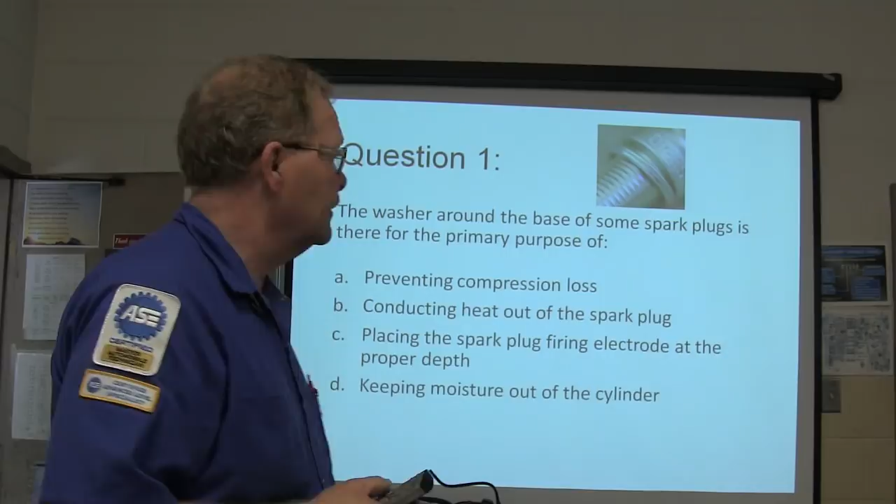We're gonna ask some questions here, and we're gonna see if we get these questions right. We're gonna swap papers when we're done. We're gonna grade our papers. And if you make a good grade on this, more power to you. If you don't, it'll be a wake-up call, right? This is not a difficult test. It's very simple stuff.

I want to ask you if the washer around the base of some spark plugs is there for the primary purpose of what? Why is it there? Is it preventing compression loss, conducting heat out of the spark plug, placing the spark plug firing electrode at the proper depth, or keeping moisture out of the cylinder? Just write your answer in the box. Okay, I already canceled 2 of them, so you need one more.

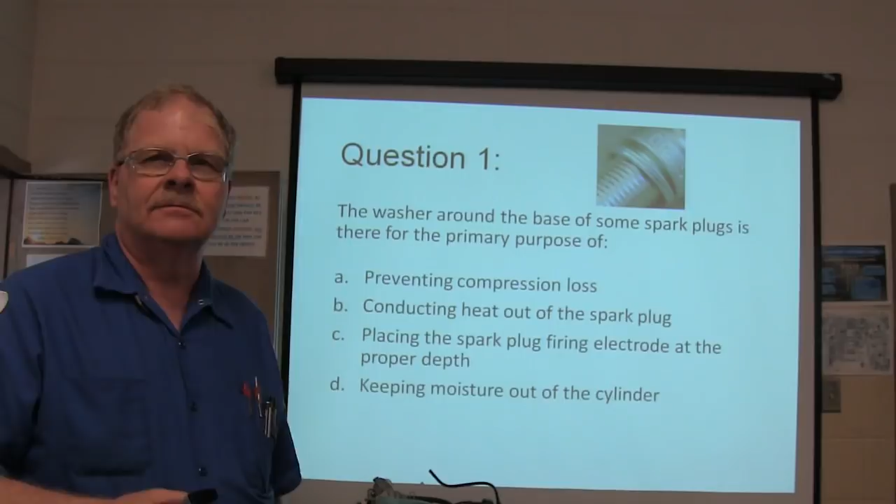If you're stressed out by tests, don't be. It's not hard. You know what stressed spelled backwards is? Dessert. What? It really is. If you take the word stressed and spell it backwards, that's desserts. You've never seen that before? Plural. Yeah.

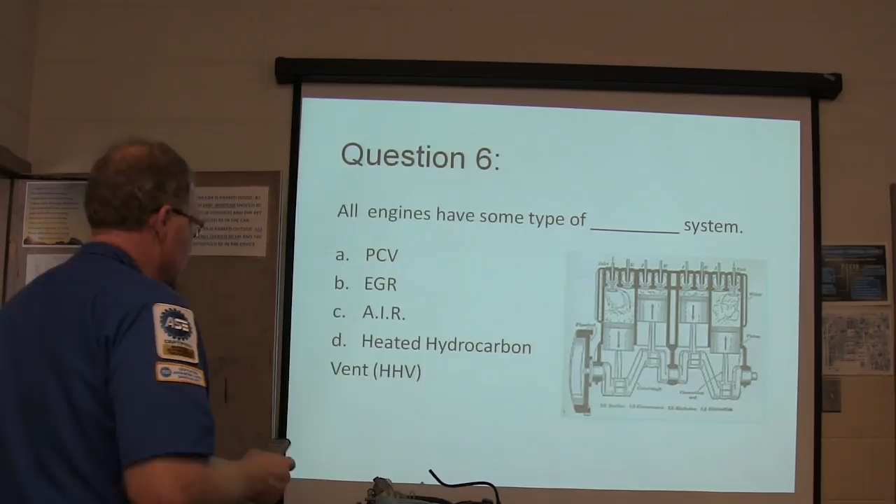What's AIR? Is it air? Air injection reactor. Oh, okay. I thought it was air. Now, whenever you see these little dots after each letter, that means that's an acronym. I know, but that's why I was asking.

That's like the acronym PAID. Remember what that stands for? Performance, attitude, integrity, and dependability. If you have good performance, but you have a bad attitude, no integrity, and you're not dependable, you can have 3 of those and not have the other one and be a failure.

You can do your work. Yeah, I'm telling you, if you're short in any of those 4 areas, performance, attitude, integrity, and dependability, if you perform good, you got integrity and you're dependable, but your attitude sucks, sooner or later you're gonna be gone. They're gonna get enough of your junk, they're gonna send you down the road. I've seen it happen too many times.

There were 25 mechanics in that shop where I worked, and I saw a lot of them come and go during the years over there. And it was always tied to one of those things whenever one of them would get let go. Integrity means, this one guy, whenever the work would come in, he would tell the customer privately, if you'll bring this to my house, I'll do it cheaper. And he'd lay out of work the next day and it was stealing work from the shop. The service manager went by his house one day and saw one of the cars out there, and that was over for him.

A lean air fuel mixture bums? Looks like, what's it, bums? Should say burns, outstanding. A lean air fuel mixture burns cold and fast, hot and slow, or cold and slow.

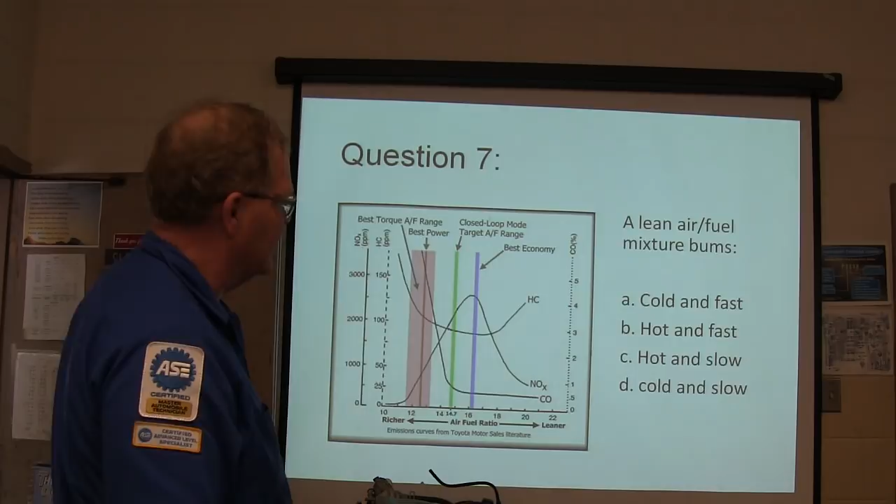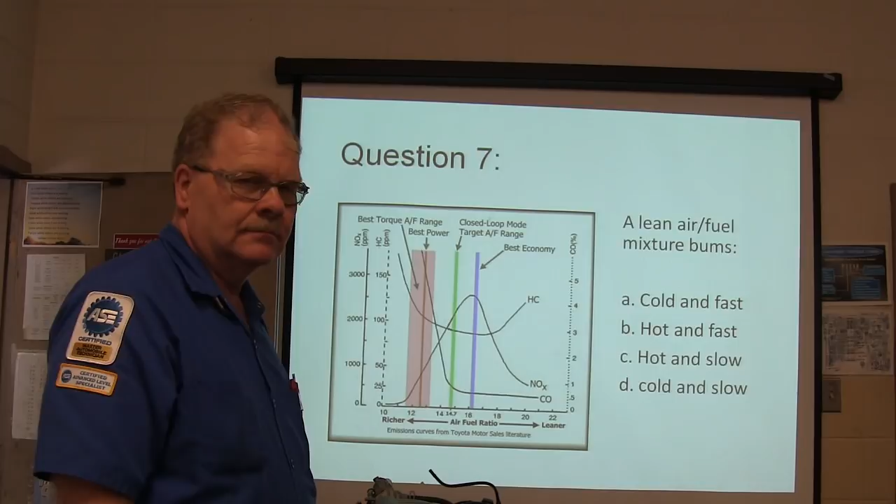The fuel pump on a vehicle can be heard for 2 seconds at key on, but the engine will not start. The fuel gauge shows a full tank. Fuel pump current draw is 8.9 amps. Which of the following is least likely to be the cause? Empty fuel tank, water in the fuel tank, inoperative fuel injectors, fouled spark plugs. So which one's least likely? All of those answers are possible, except one of them is not likely to be the cause.

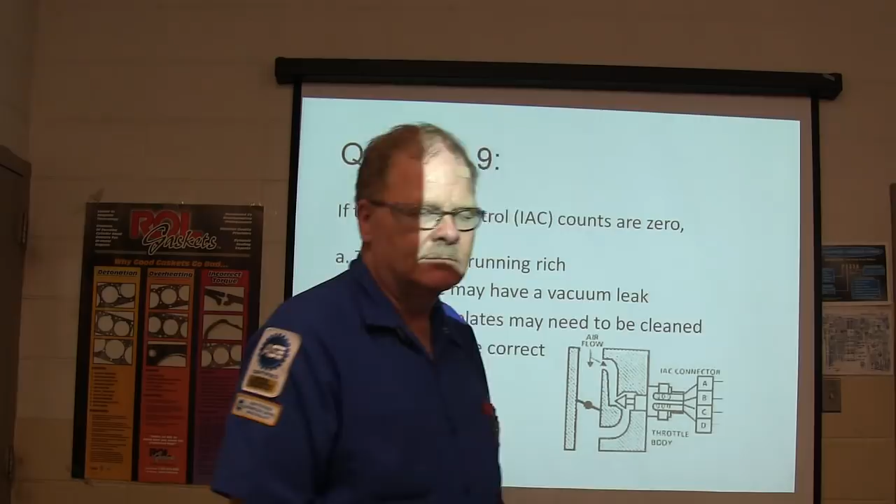What you know? I got a blow dryer, it ain't gonna get no better. Well, it'll get better if you don't touch it a lot. You know?

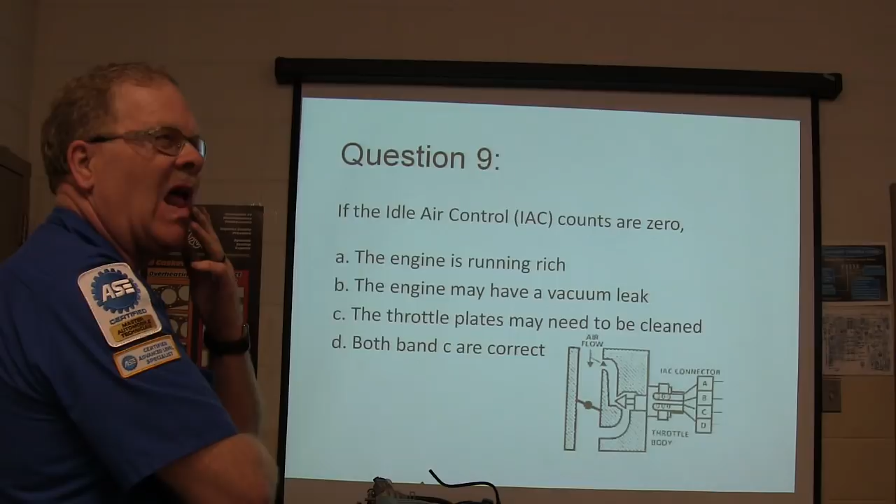Question 10. An engine's running at 243 degrees. The cooling system is full of clean coolant. The air conditioner is off, but the fans cycle on at the proper engine coolant temperature, but they never cycle off. Both heater hoses are cool to the touch. Of the following, which is the most likely to be the problem? Stuck open thermostat, bad water pump, too much heat transfer from the radiator to the ambient air, or too much hot gas EGR flow.

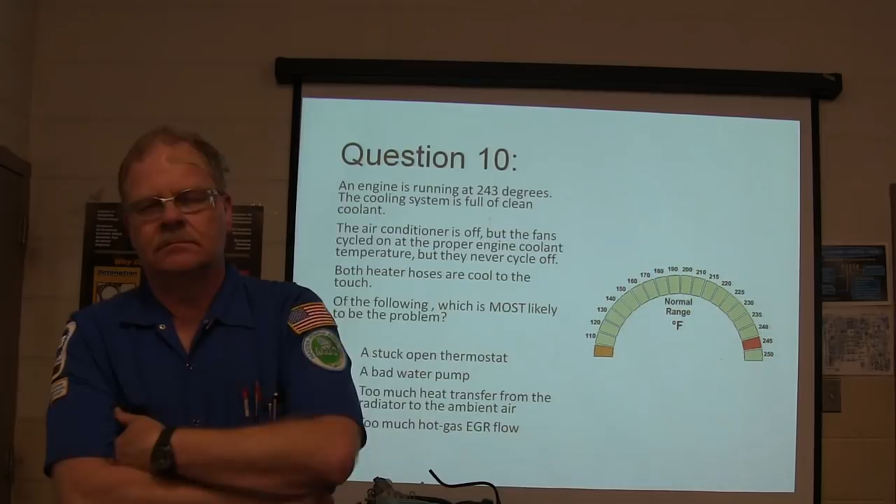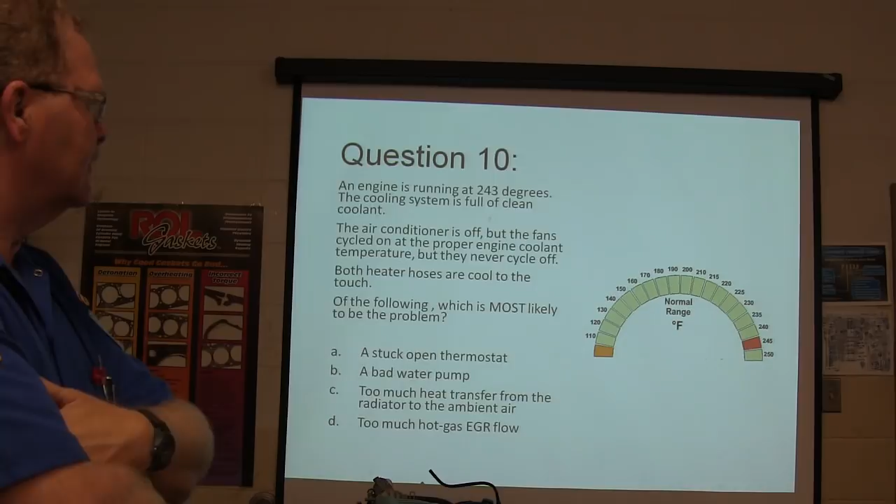Technician A says the output of a Hall effect sensor can be checked with an AC voltmeter. Technician B says the output of a variable reluctance sensor can be tested with a lab scope. Who is correct? A only, B only, both A and B, or neither A nor B?

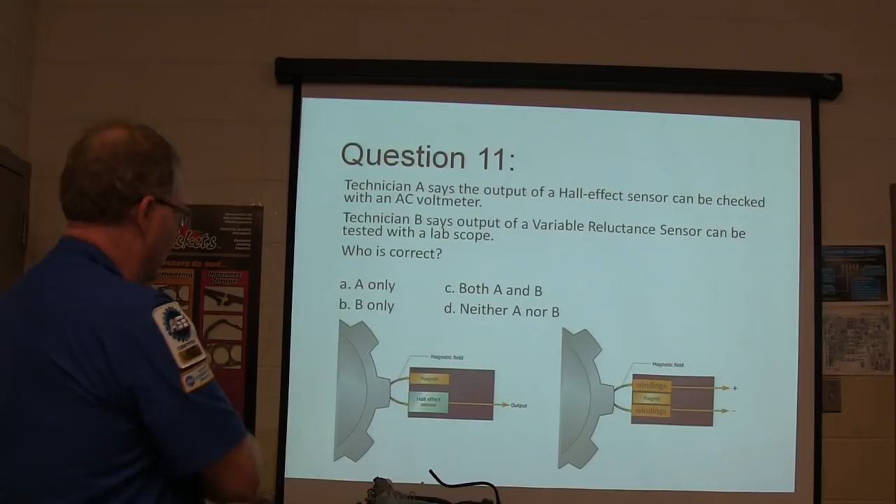This isn't exactly drawn right, because even these kinds of sensors will typically have 2 or 3 wires. What was one thing that OBD1 regulations required after 1988 that was not previously required?

EGR system failure can cause A, higher cylinder combustion temperatures, B, pinging detonation, C, higher NOx emissions, or D, any of the above.

Kendrick, are you killing this? Killing this test? Yep, test you'll be, buddy.

A technician has been led by diagnostic trouble codes to investigate fuel trim numbers as follows. Short fuel trim, 1%. Long fuel trim, minus 25%. A, the fuel filter may be restricted. B, the crankcase oil may be contaminated with fuel. C, the fuel pressure may be low. Or D, any of the above.

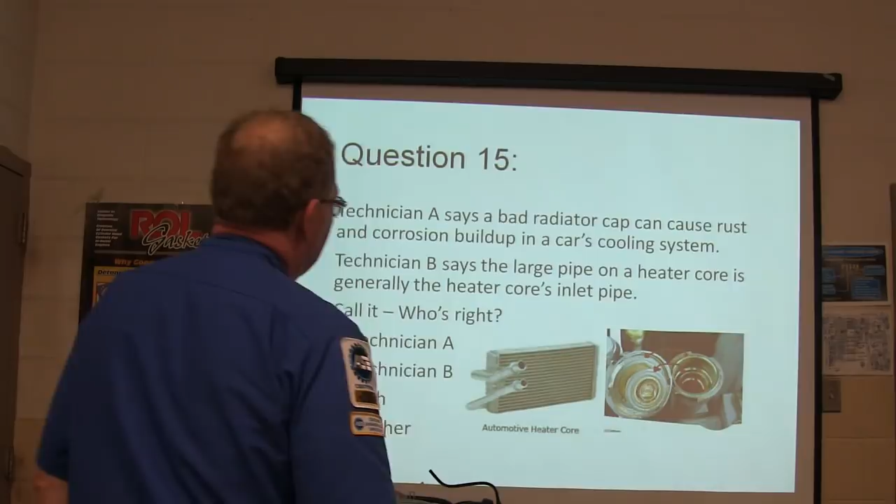Technician A says a bad radiator cap can cause rust and corrosion buildup in a car's cooling system. Technician B says the large pipe on a heater core is generally the heater core's inlet pipe.

Technician A says injector firing frequency is directly tied to crankshaft sensor input. Technician B says on an engine with a crankshaft sensor and a distributor, improper distributor rotor alignment can be corrected by adjusting the ignition timing.

A technician is investigating a no-start condition on a vehicle with the following PID values. What is the most likely reason for the no-start? Faulty baro sensor, weak throttle position sensor, open IAT sensor circuit, or none of the above, he needs to check more PIDs.

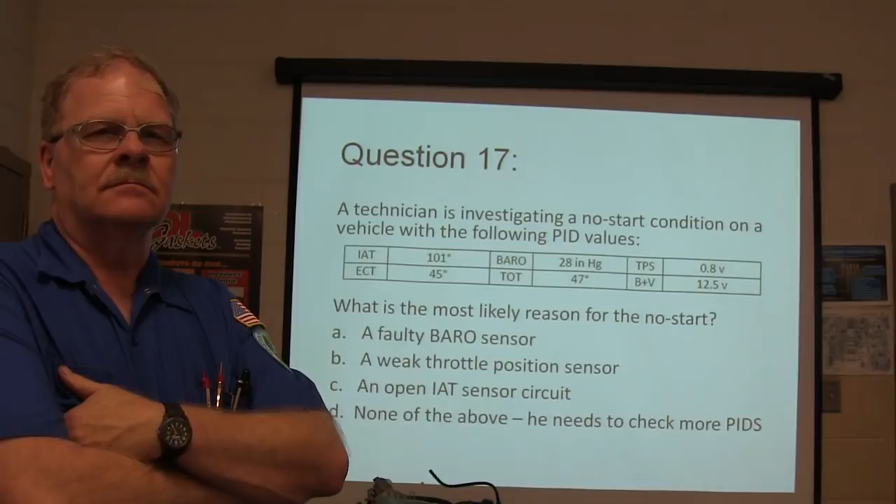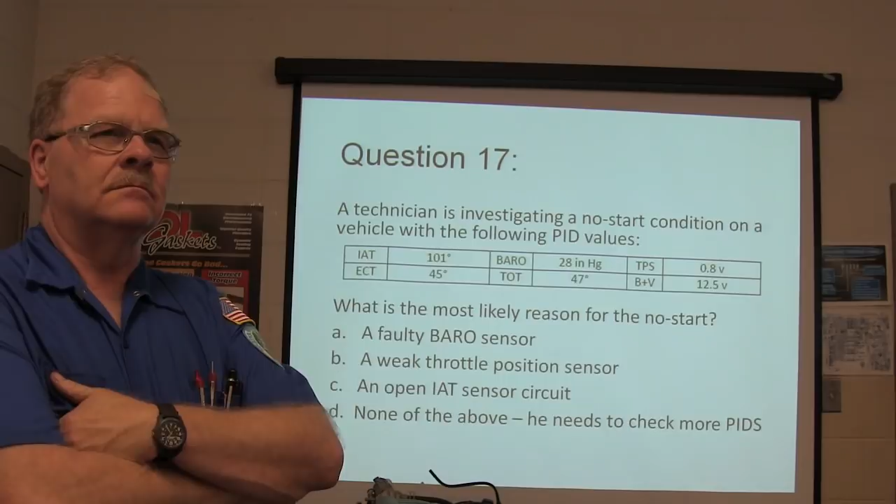A five-cylinder engine has a firing event every how many degrees?

The temperature stamped on the copper case of the thermostat's wax pellet is the temperature at which the thermostat does what?

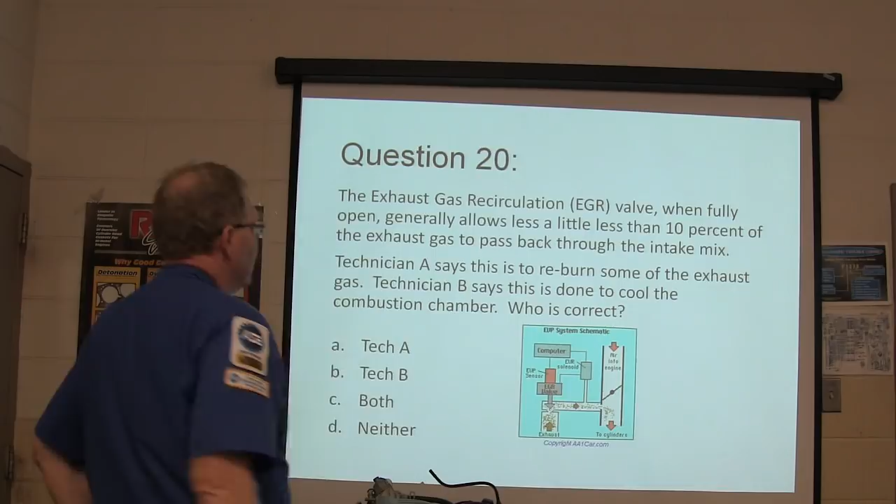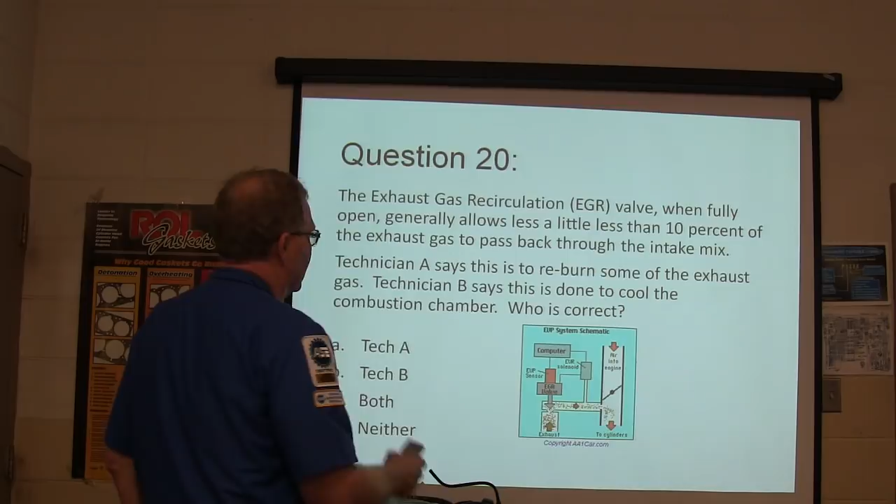The exhaust gas recirculation valve, when fully open, generally allows a little less than 10% of the exhaust gas to pass back through the intake. Technician A says this is to reburn some of the exhaust gas. Technician B says this is done to cool the combustion chamber. Who's correct?

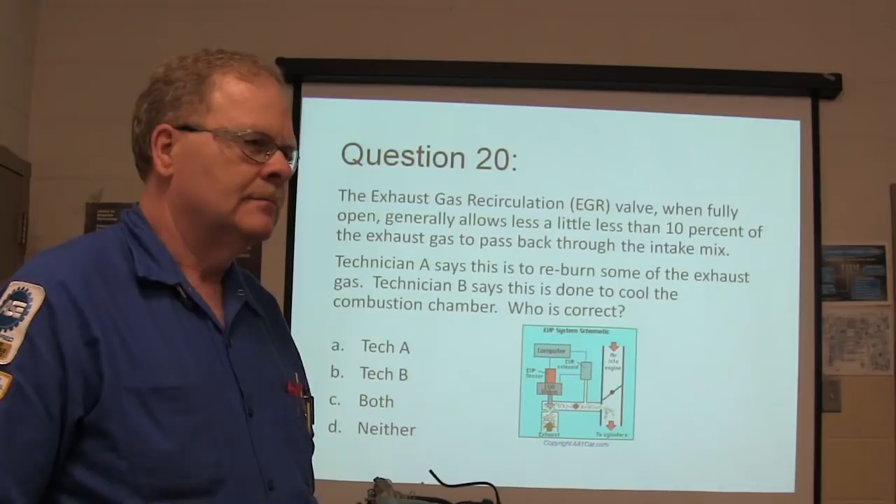Kendrick, you already answered one?

If the vehicle speed signal is suddenly lost at road speed, what generally happens? A, the speedometer needle drops to zero. B, the speed control suddenly becomes dysfunctional. C, the transmission drops back to first gear. D, all of the above.

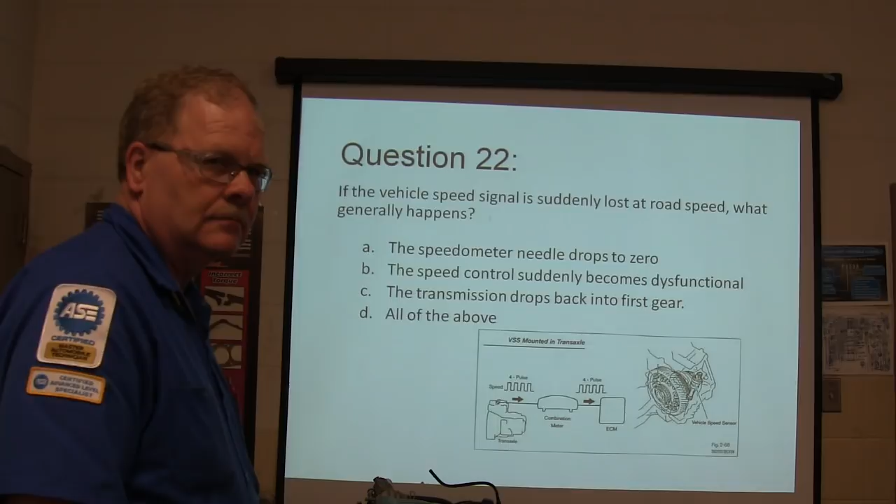If an engine with an automatic transmission is placed in drive with the brakes locked and the engine accelerated to wide open throttle, what information might be gleaned from watching the stall speed on the tachometer?

It can be none of these, but it could be all of these, but which one would be none of these? Don't you just love the ones with all those choices? Less likely to guess your way out of that one, huh? True. Well, you know it can't be all of the above and none of the above at the same time. That's a thinker.

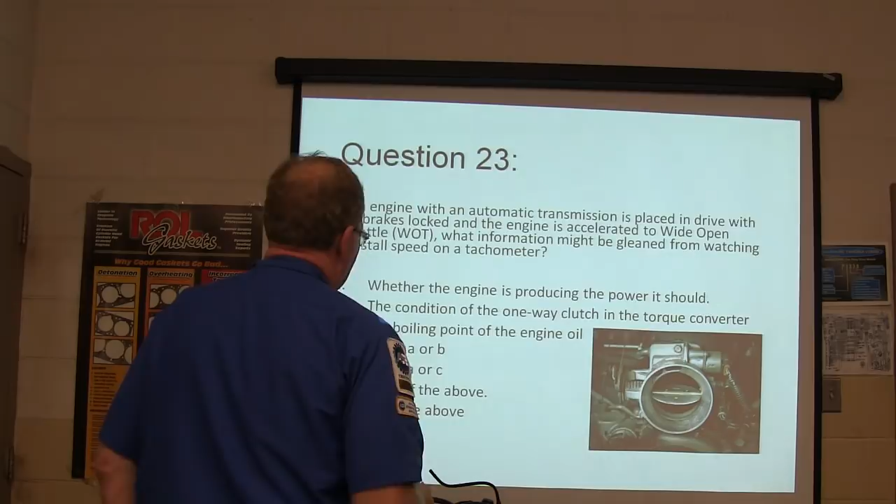A vehicle is traveling down a straight highway with short and long fuel trims hovering near zero. Suddenly, a spark plug on bank 2 fails and begins misfiring. What will happen to the O2 sensor signal on that bank when this takes place? The moment it takes place, what does the oxygen sensor signal on that misfiring bank do?

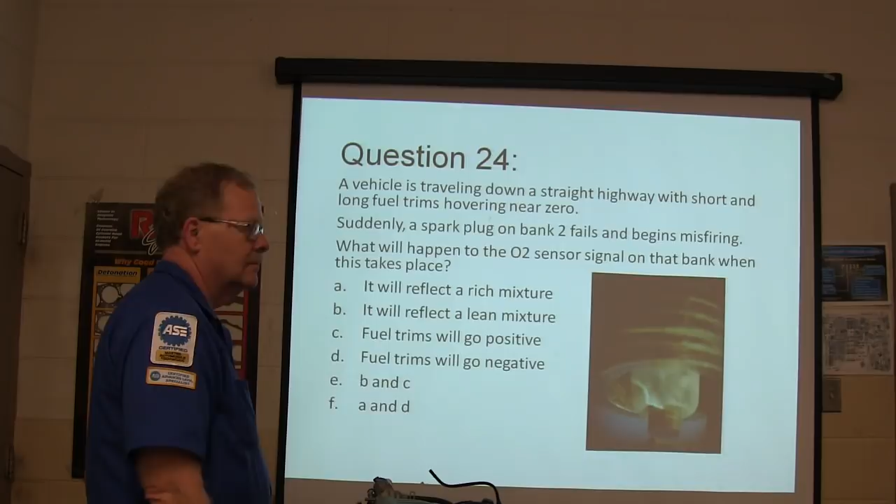If you switch on the ignition and hear the fuel pump, what do you know? Well, do that. Always got one, right? Is that good?

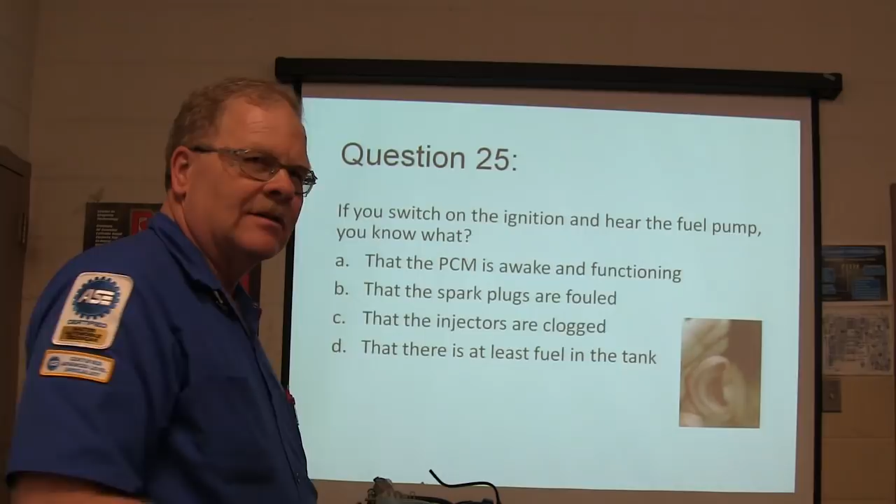Right now, I like it. Because, who is this outside? That's probably Timothy. It sounds like Timothy, because he drags in about this late after lunch, and that sounds like his ratty old truck. Savage.

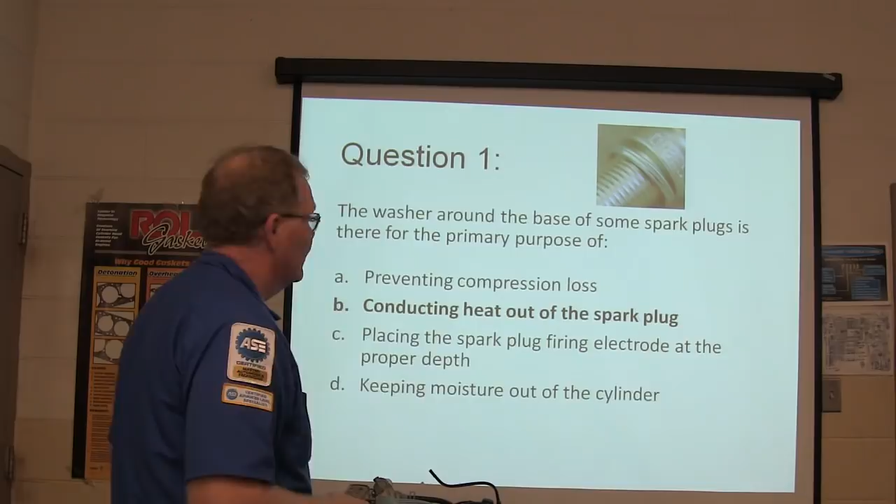This one here is B. It's there to conduct heat out of the spark plug. Do we just put a check mark next to it if it's wrong? Yeah. That's probably the only one anybody will miss though.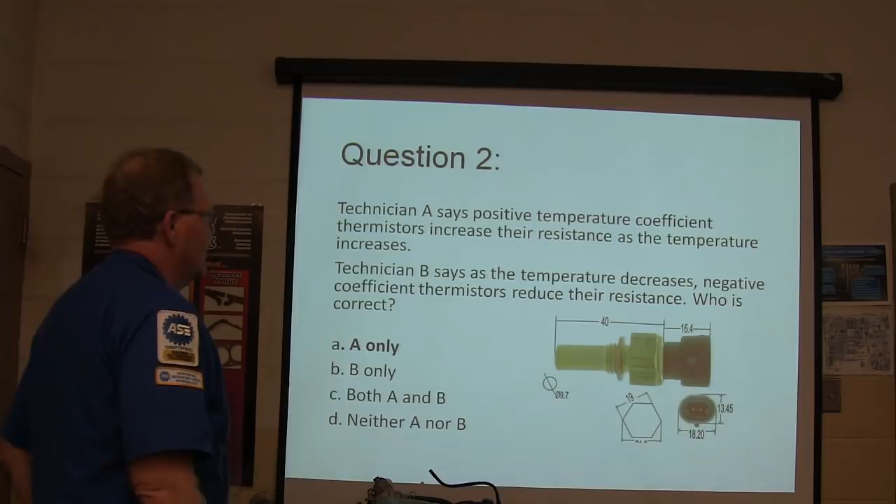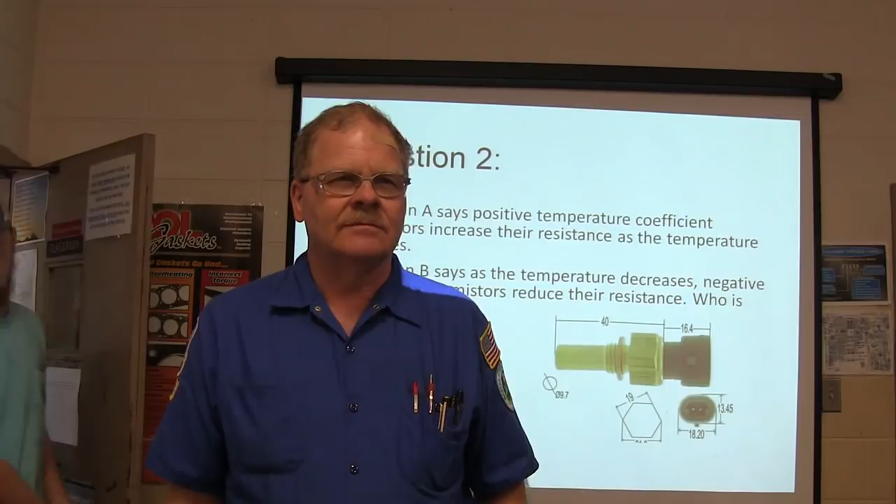Technician A says positive temperature coefficient sensor, blah blah blah. That's A only. Negative temperature coefficient thermistors actually decrease their resistance as they get hotter, which is the opposite of what you'd expect. A light bulb is a positive temperature coefficient thermistor.

I recognize the sound of that truck and all that. You missed the test. Whoever got Timothy's paper, give him a zero.

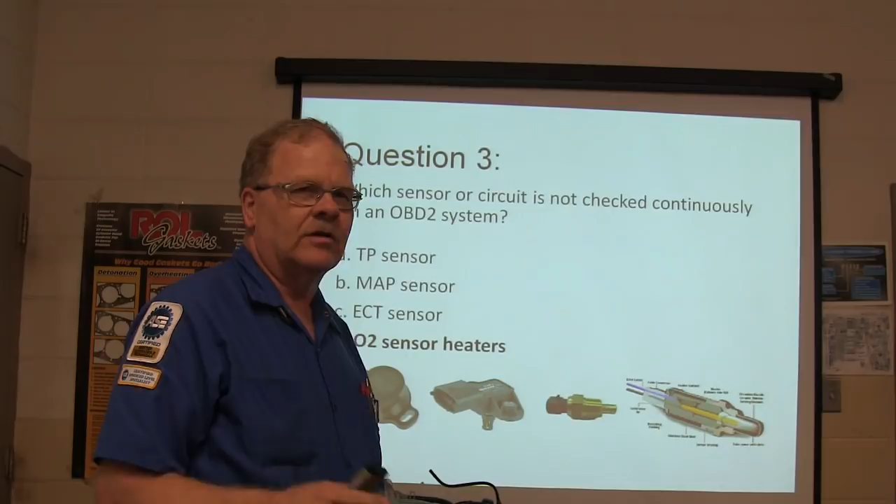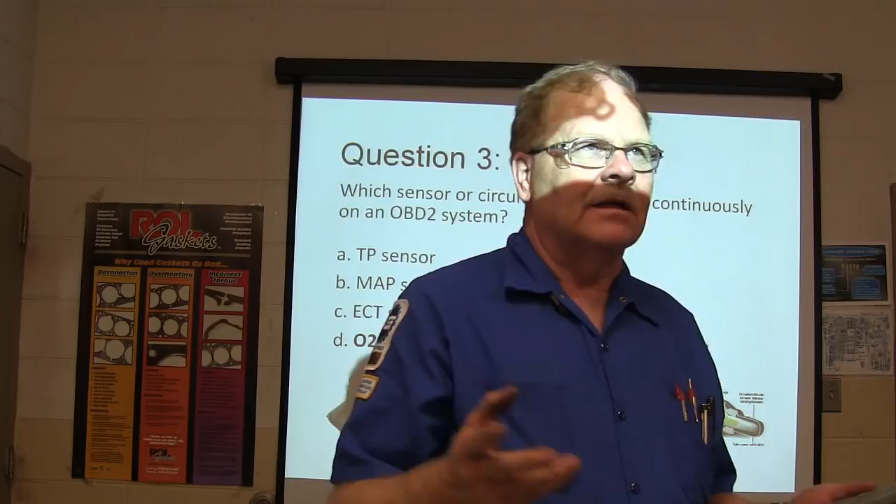All right, this is D. O2 sensor heaters can only be checked whenever you're looking at the different monitors. You got continuous monitors, and then you got monitors where certain criteria has to be met. For example, the engine controller cannot check the catalytic converter unless it's been driving for a certain amount of time at a certain speed. Then the oxygen sensor, the fuel trim monitor, has to be in closed loop and all that. There are certain things that have to be happening, like also the evaporative system will not measure the integrity of the evaporative system unless it has between 15 and 85% fuel.

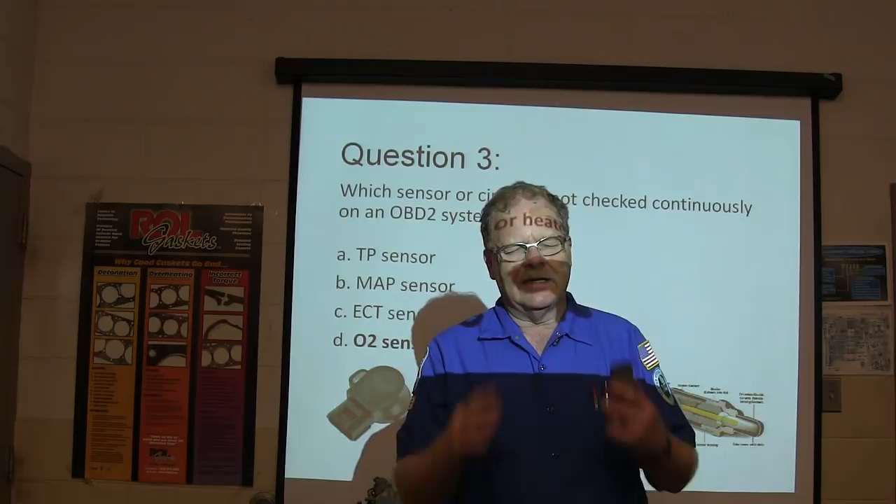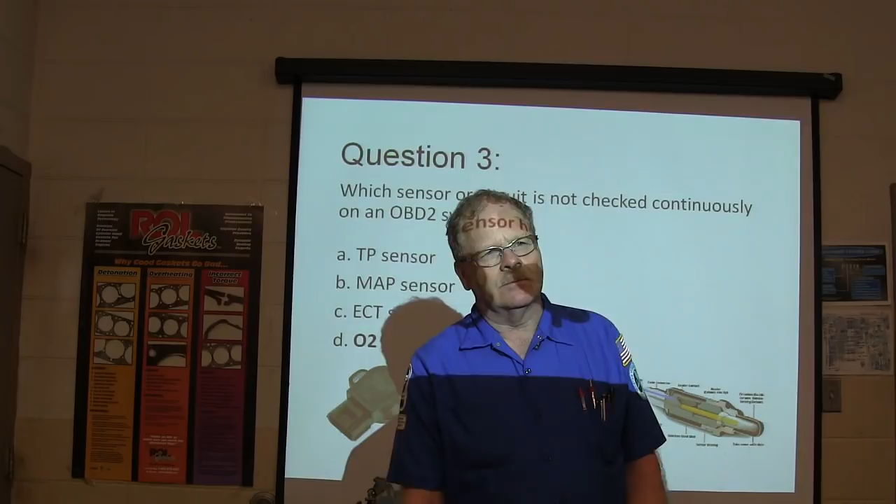If it's full all the time or empty all the time, why should you not run your gas tank empty all the time or real close to empty, like Tim does? What's up with that? Why should you not? Somebody give me a reason.

You can't check the evaporative system. That's part of it, but the other part is, if you're running real close to empty all the time, you may be cavitating and getting air in there, which may wear the fuel pump out quicker. Also, if you got a lot of empty real estate inside that tank, water has a tendency to condense in there. It's not so much a big deal if it's a plastic tank, but if it's a metal tank, you're going to have rusty innards on your tank and everything else.

You bring me some stuff there, Hot Rod? No, come on, I'll sign the paper in here.

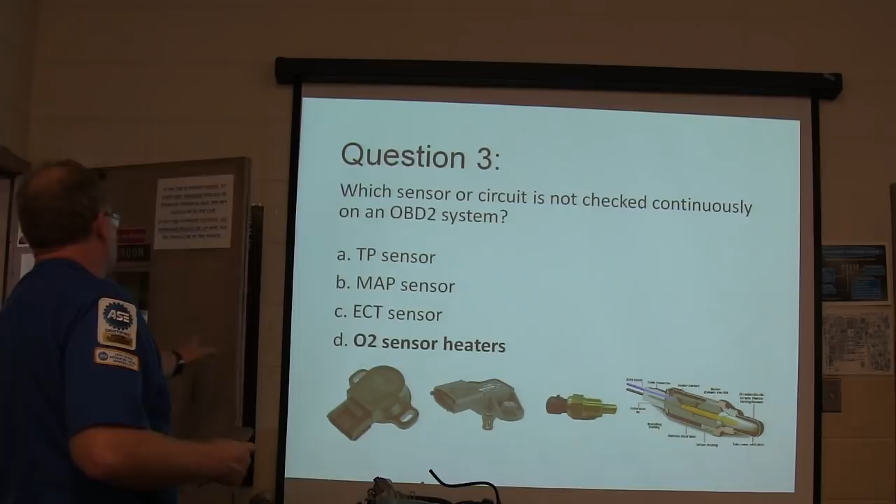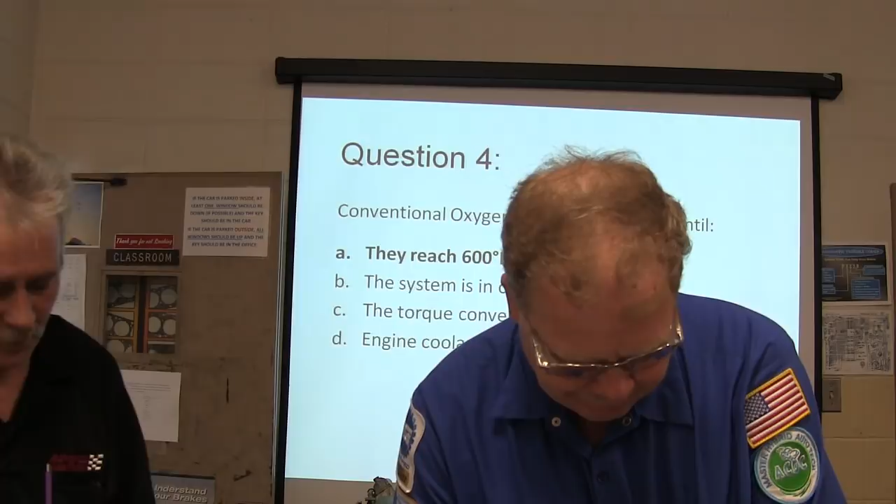What is that oil and filter for? I don't know, he told me to bring it. Yeah, I guess I probably shouldn't. Brake fluid I knew about, yeah. There you go, right, thank you, y'all have a good day. Thank you, sir. Is it in the box going back or return to? That is, they're going back.

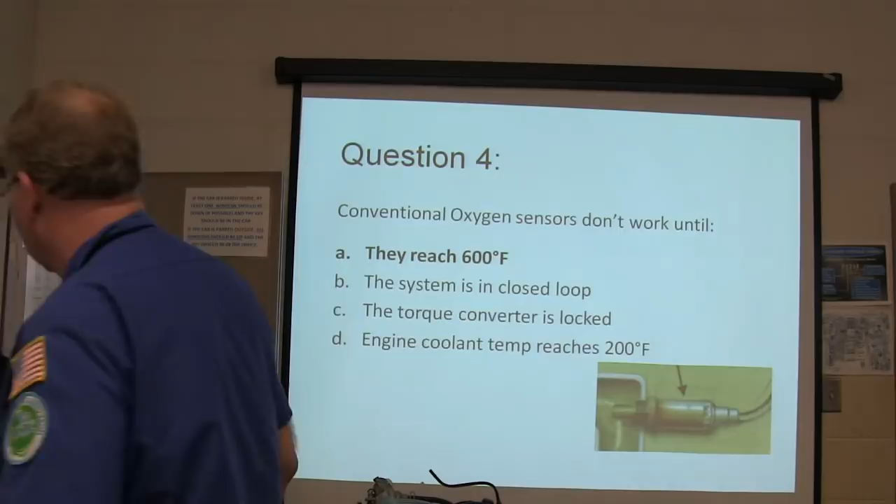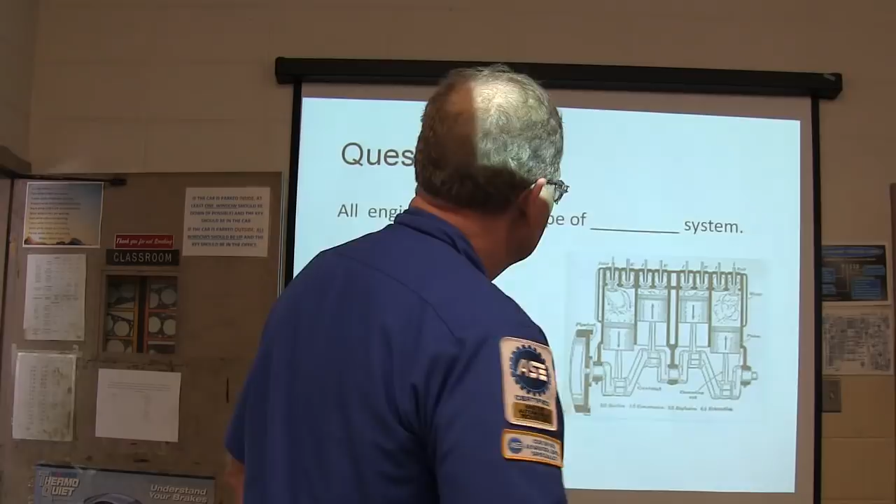All engines have some type of PCV system. What's PCV stand for? Positive crankcase ventilation. Positive crankcase ventilation, good job.

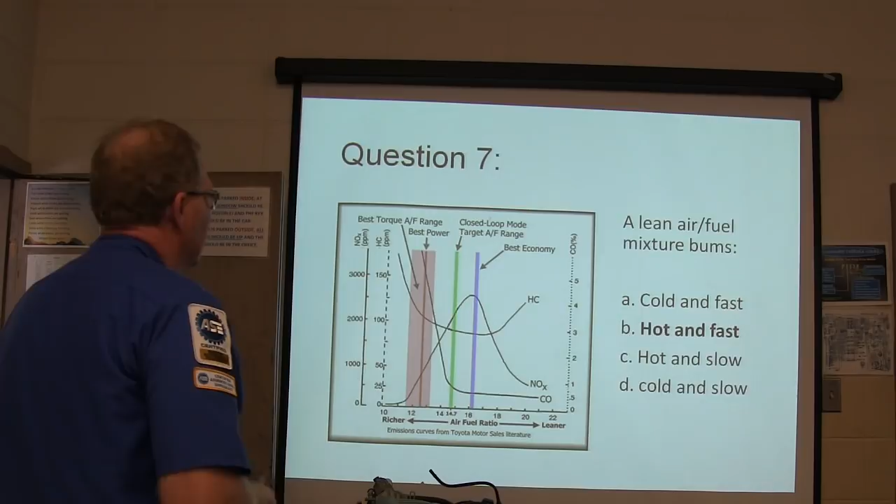Clean air, lean air-fuel mixture burns hot and fast. A rich mixture burns cold and slow. If you've got a rich mixture, if I pull a spark plug out and it's running rich, what's that spark plug going to look like? It's not necessarily going to be gas on it, I mean it can be dry, but it can be sooty. If it's got soot on it but it's dry, it's running rich. If it's running really rich, it's going to have hydrocarbons coming out the exhaust and have a wet plug. If it's running just mildly rich, it's going to have carbon monoxide coming out the exhaust and it'll have a sooty plug. If it's running really, really lean, it'll have a snowy white ceramic on that plug usually.

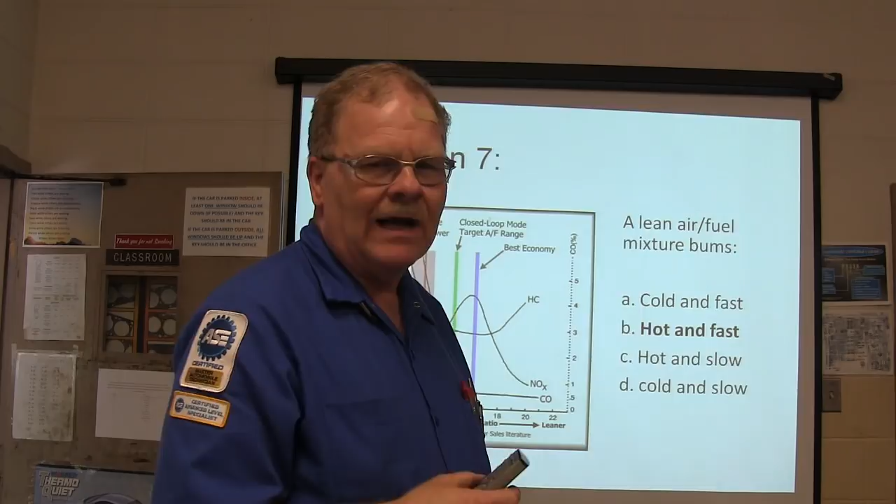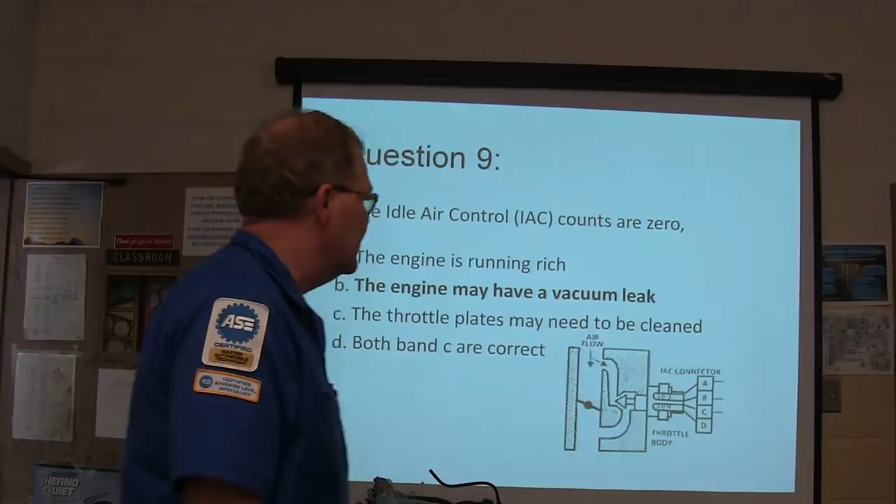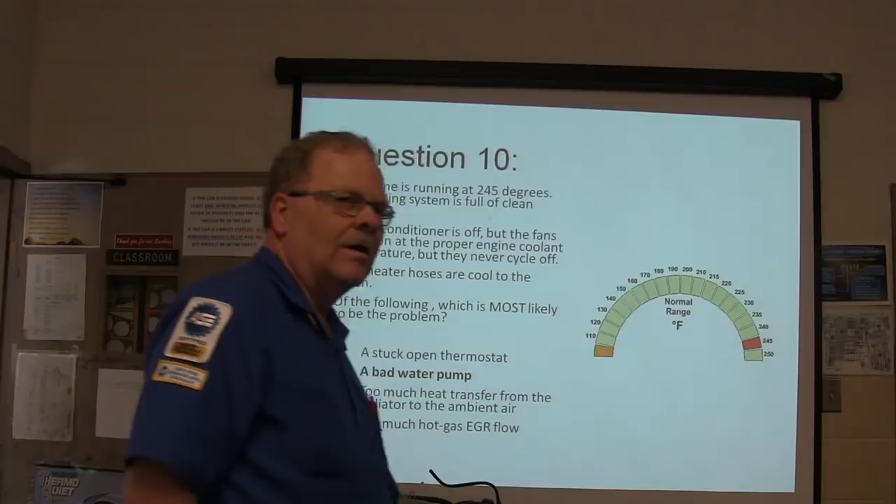Now what do you know? Air conditioner's not on, it heats up, heats up, heats up, fan kicks on, never kicks back off, you got trouble. If it keeps getting warmer and warmer, the fan keeps running, you better find out what's going on. You're gonna cook him, all that.

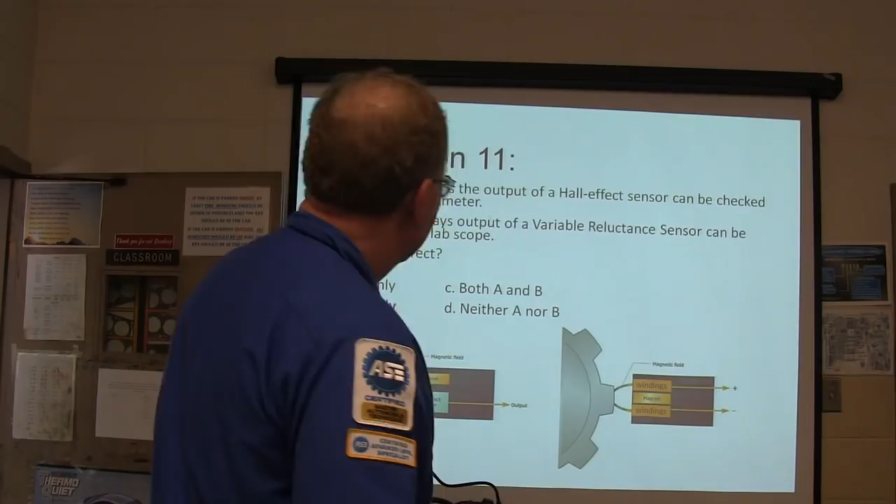I have actually seen one though, that was running hot like that because the antifreeze was old. It wasn't rusty or nothing, but I replaced the coolant and it made it run cool. That was on an Eagle Medallion a long time ago. Well, the thing about question 10 is it said that it had clean coolant in it. That one does, that's right. But that particular one, the most likely cause would be water pump.

Technician A says, the output, cool, I don't know what that is, but I'll take it. All right, thank you.

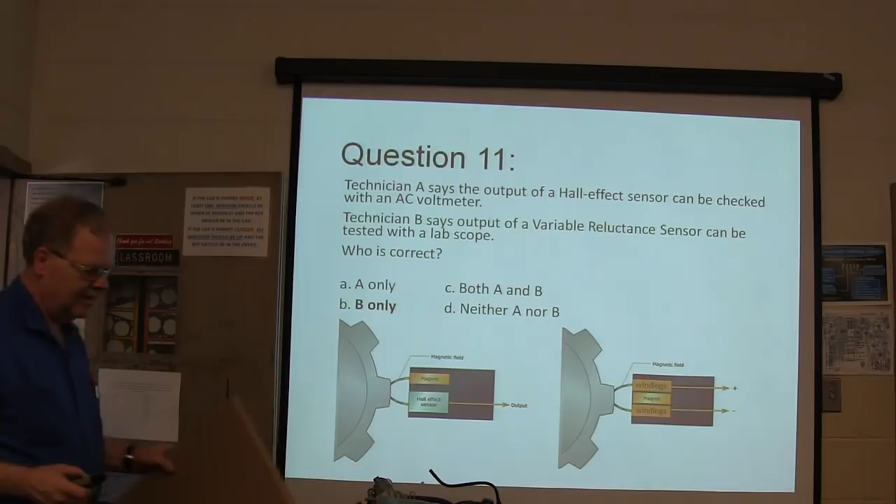Look, I have a box. No idea what that is.

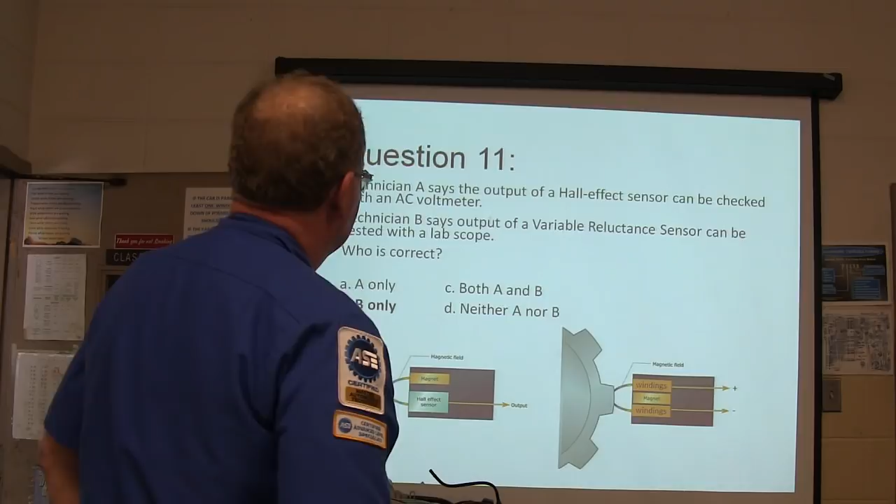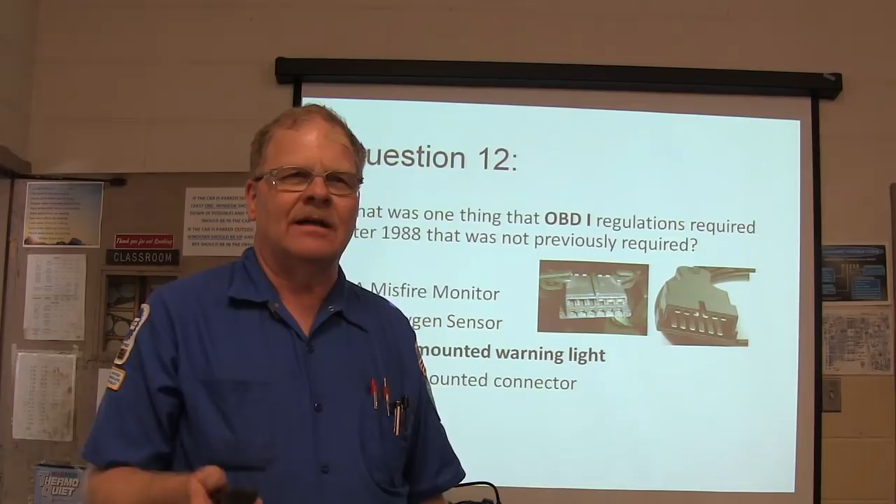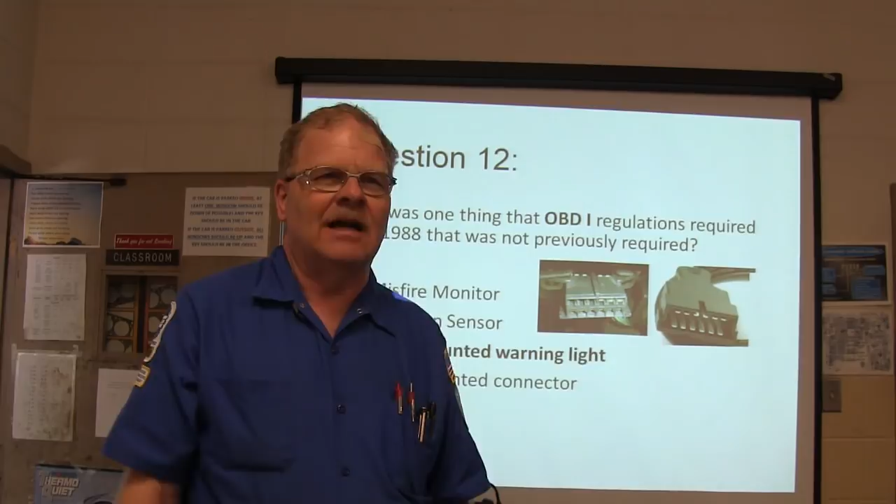One thing OBD I required was a dash-mounted warning light. And even after that, Jeep tried to not put one on there for a long time. Ford didn't have a check engine light until 1988, which is pretty cool because it kept the customers from coming in there all the time saying, my dadgum check engine light won't go off. And General Motors had them from 1981 up. A lot of people that drove those GM cars in the early days said the only thing that consistently worked on that car all the time was the check engine light. It always worked. But as you know, we had a guy that brought his pickup truck in here.

Well, the same guy that you checked the codes for on the Volkswagen the other day, he brought his pickup truck in here. It was a 98 F-150. He said one of the complaints that he wanted fixed was the check engine light. Check engine light didn't work. He wanted that fixed. I said, oh, wonderful, now we'll fix the check engine light. He'll be in here every time you turn around with a check engine light on. And there he hadn't, you know, I mean, after all.

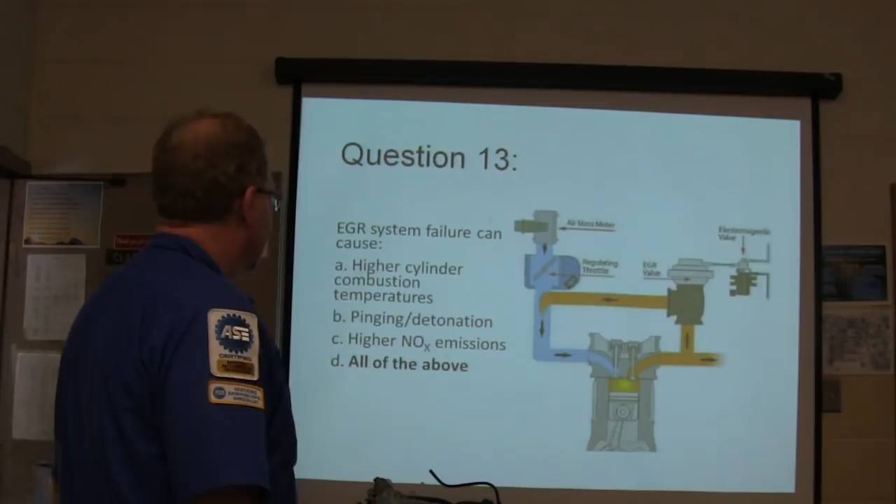EGR system failure can cause all the above: higher NOx emissions, pinging, detonation, higher cylinder combustion chamber temperatures. You take some inert gas, you put it back in there, it doesn't burn as hot, doesn't make the oxides of nitrogen. But we got nitrogen, oxygen, they lock together when it goes over 2,500 degrees, that's what that's about.

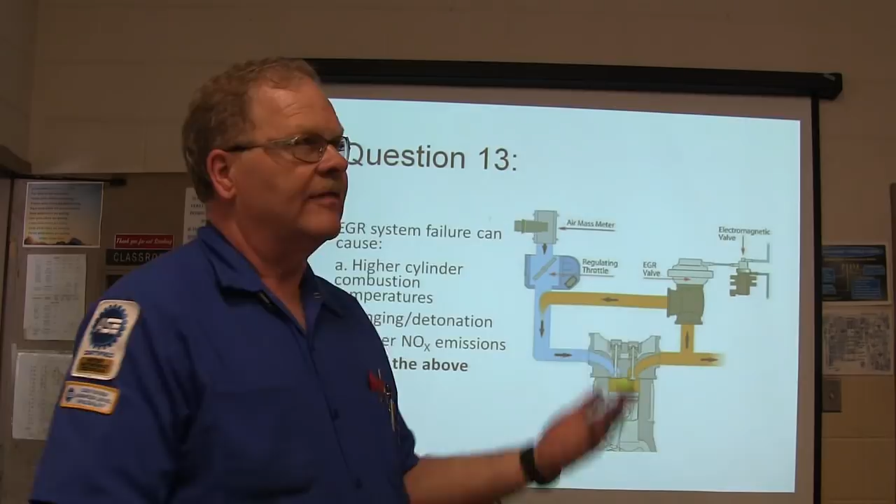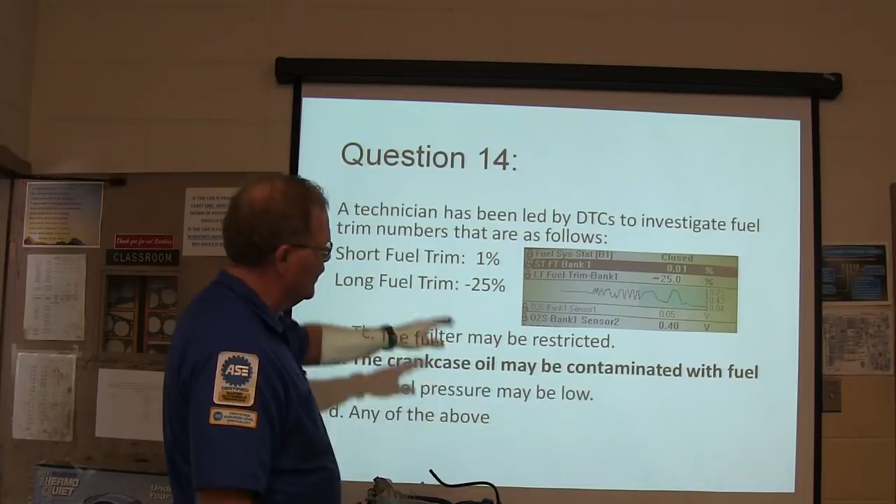Technician's been led by DTCs to investigate fuel trim numbers. The crankcase oil may have been contaminated with fuel. How do we know this? Long fuel trim means what, Professor? Negative long fuel trim means what? That means it's subtracting fuel.

Okay, so how would a contaminated crankcase oil cause it to run richer? Because of gas in the oil. The PCV system is gonna be pulling gas vapors and running them through the mix, got it?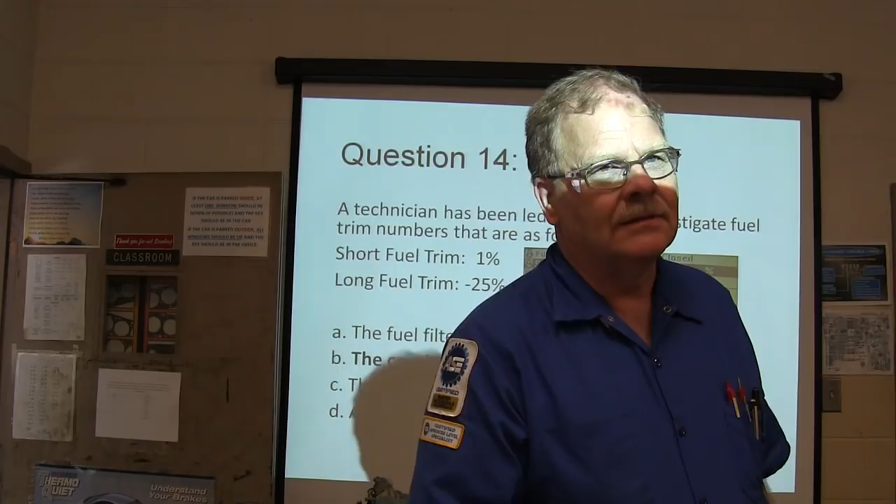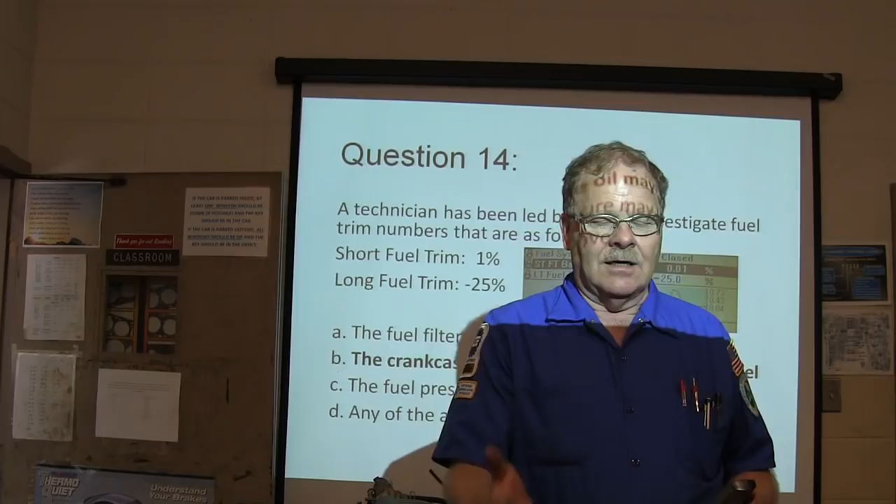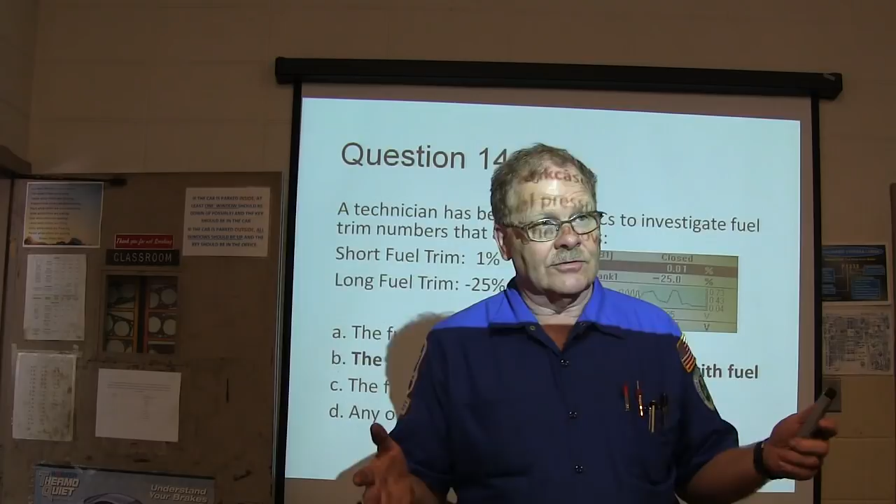As a matter of fact, one of the tests that Ford used to have us do back in the day, I think in the 80s when we first started getting this fuel injection stuff, is they would say if you got one that's running rich, the first thing they wanted you to do was pull the EGR valve, not the EGR, the PCV valve, and stop it up so that it couldn't get any air. And if you pull the PCV valve off the crankcase and it normalized, then you know it needed an oil change. That still works today. I've actually had vehicles come to me and the only thing wrong with them was they needed an oil change. Running rich. Subtracting fuel. All that.

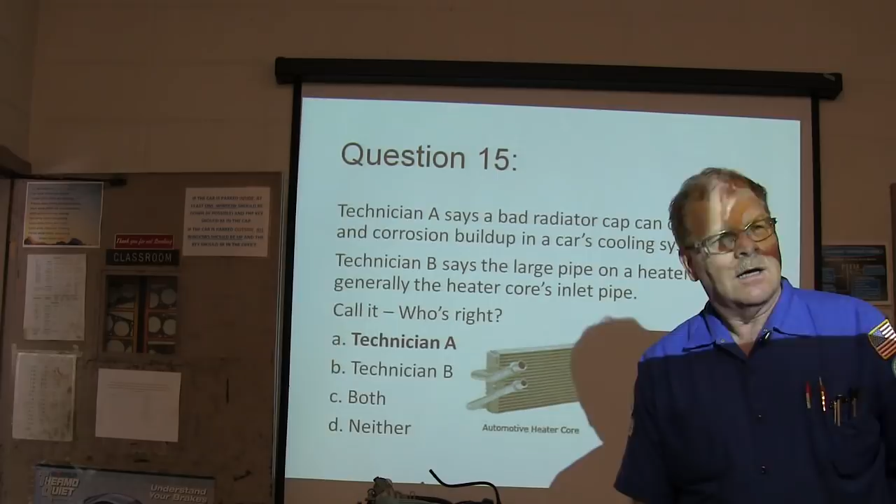Technician A says a bad radiator cap can cause rust and corrosion buildup. Technician A is right. If air can come and go whatever it wants out of there, what's in that air? Oxygen. What does oxygen do? It causes oxidation. What's oxidation? Rust. What's free radicals? Yeah, in your system. You know?

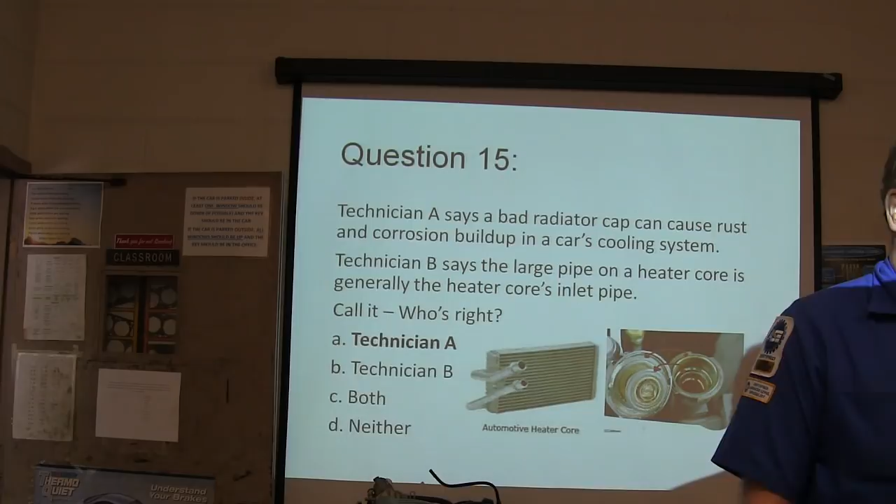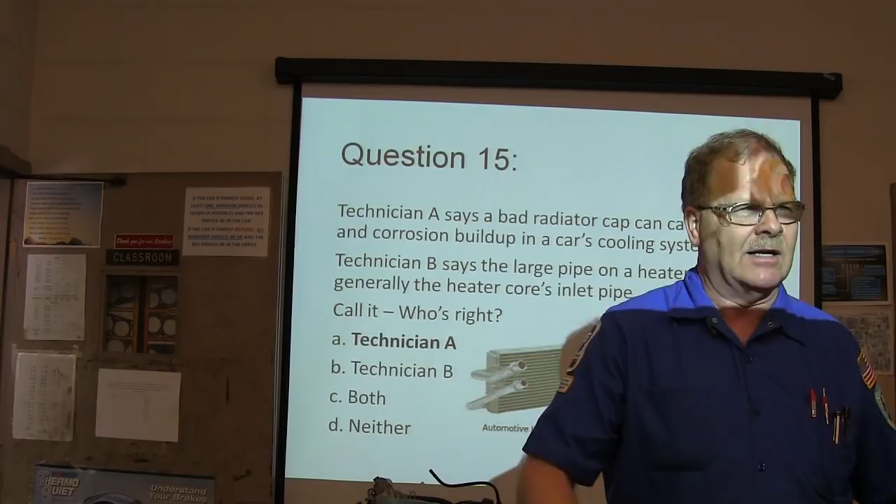Remember that one James Bond movie, they said you gotta go to the health club because you've been eating this caviar and drinking too many dry martinis and your system's full of free radicals. You gotta get all cleaned out. So on the way out the door, Moneypenny says, what are they sending you to do today, Mr. Bond? He goes, eliminate all free radicals. And she goes, oh. Supposed to go kill everybody, right?

You remember when we put the radiator in? And we put the distributor in too.

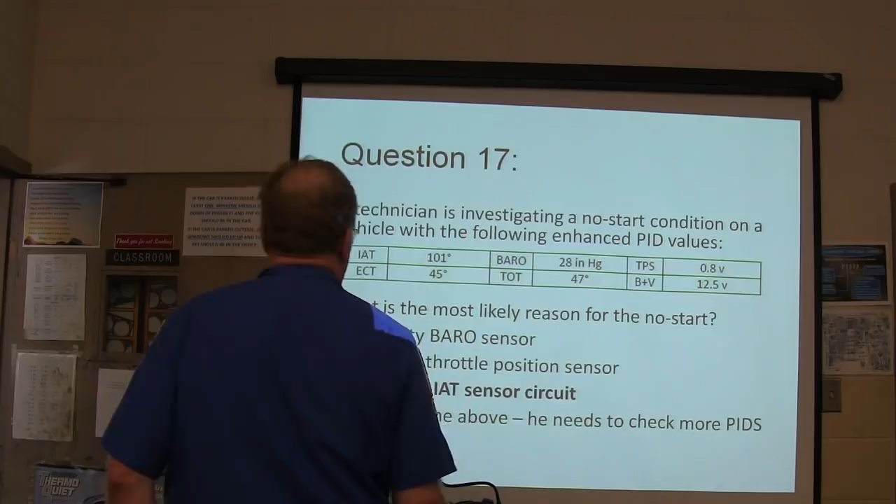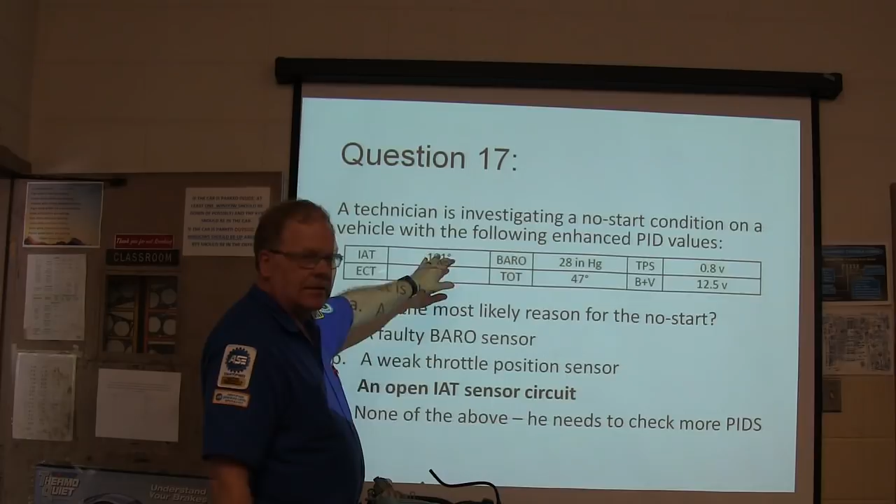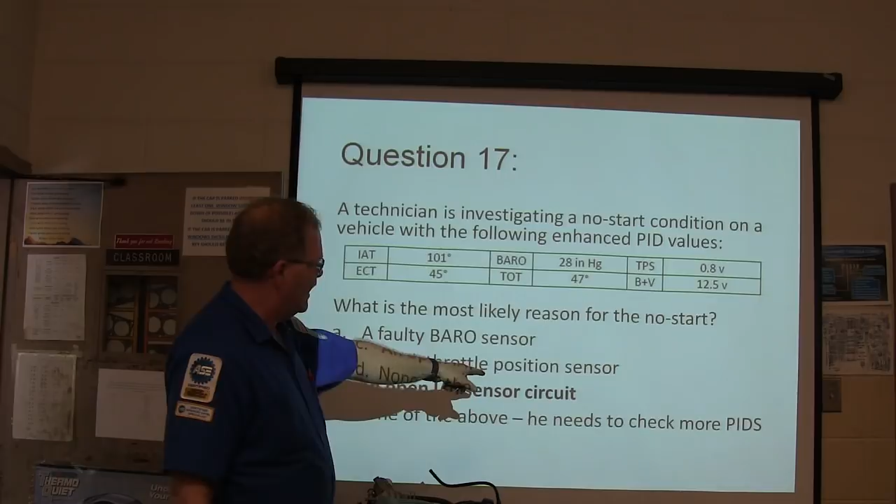All right. What's wrong with this? What are you seeing? What do you see that's unusual? I'm seeing two temperature sensors that are reading real close, and one temperature sensor is reading way up high. This is going to be your OEM enhanced. It's substituting that value for something it knows is wrong. And that can cause problems if the temperature gets down like that. So you got an open IAT sensor circuit. If you go into your OBD2 mode and you look in there, you're going to see 40 below zero.

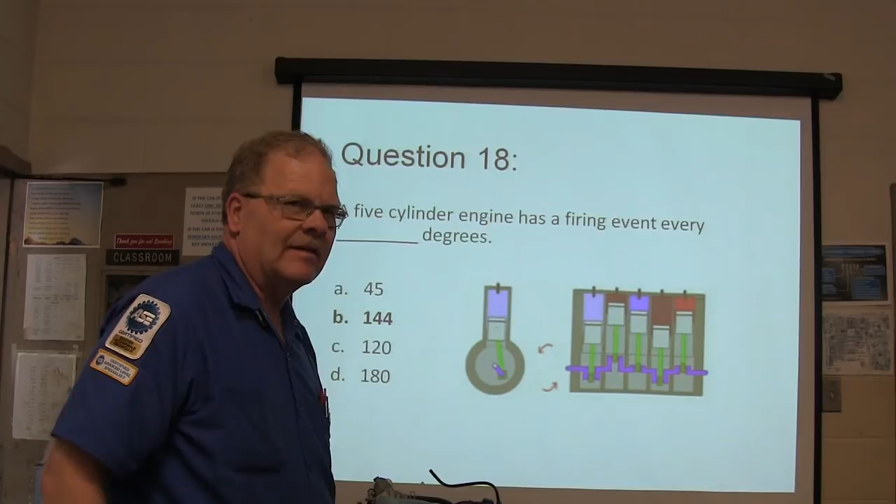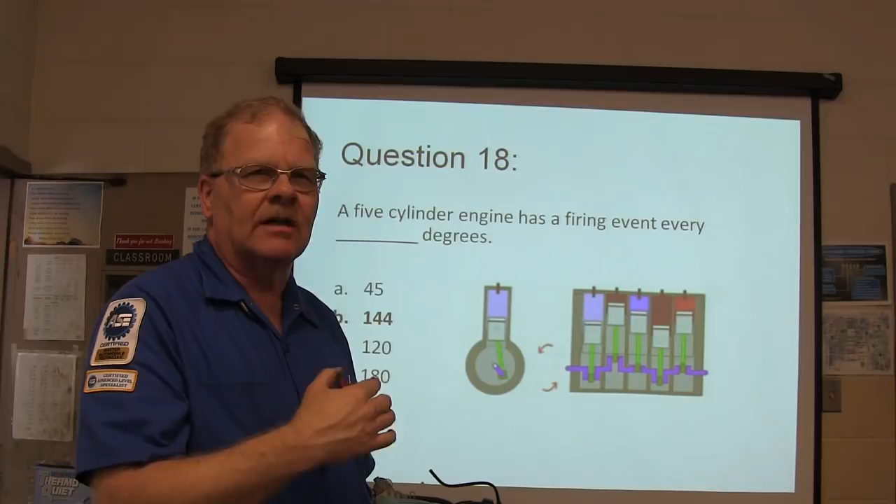A 5-cylinder engine has a fire event every 144 degrees. How do we arrive at that? How many times does the crankshaft turn for it to complete a cycle? How many degrees? What's 2 times 360? 720. What's 5 into 720? 144. If you take your number of cylinders and you go into 720, you're going to find out how often there's a fire in there. Temperature stamped on the copper case of the thermostat is when it starts to open.